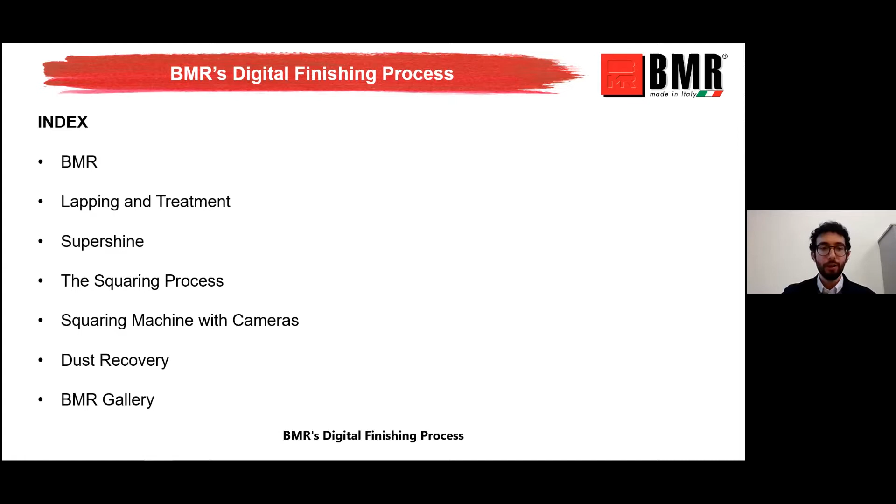BMR's areas of expertise are polishing, lapping, treatment, squaring and chamfering, and cutting systems, for processing glazed ceramic surfaces, porcelain stoneware, porous single and double fire tiles that range from traditional size up to large slabs, up to 1.6 by 3.2 meters and above. So let's start with the first video, please.

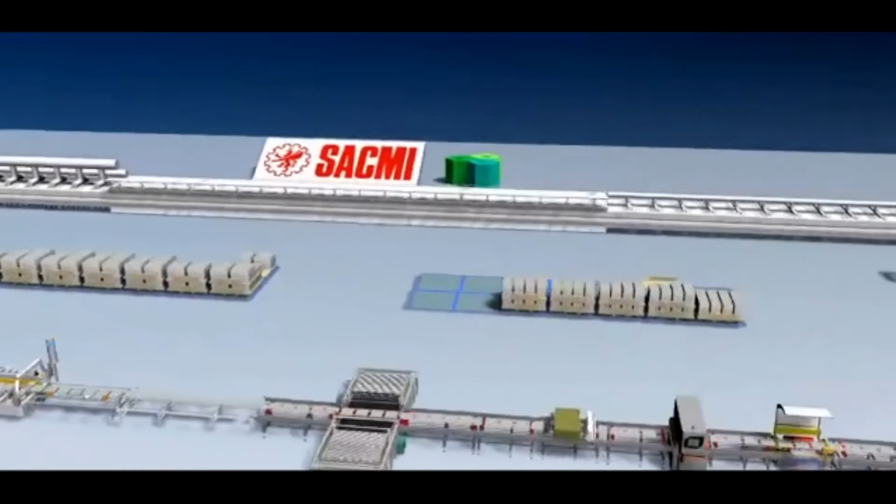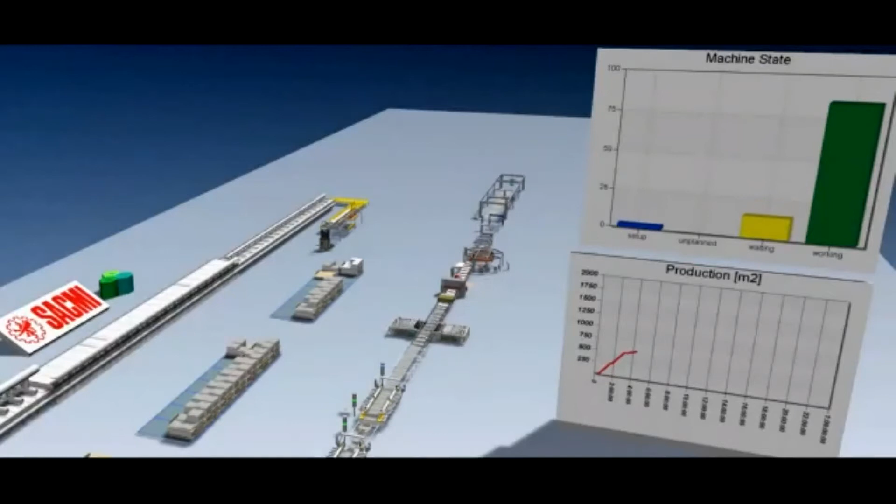Things that seemed to be futuristic some years ago now are becoming the present of ceramic production: finishing line real-time simulator, digital twin, remote control, supervision, data management, interconnection between all the machines, dynamic stock management, and 100% efficiency. In particular, here in the video is shown the digital twin simulator that can calculate and show you the true and accurate production of your finishing department.

Starting from the needed productive efficiency and tile sizes, we can hypothesize production batches and simulate the real production of your actual or future plant. This helps new projects or efficiency increments of the existing ones. Okay, having said that, let's go to the next slides and we'll see an overview of our products and latest news.

Starting from the lapping and treatment process, this is a line example of a standard BMR lapping and treatment line. First, you can see the pre-squaring department, followed by a lapping department with Leviga Plus, then the treatment, and lastly, the final squaring.

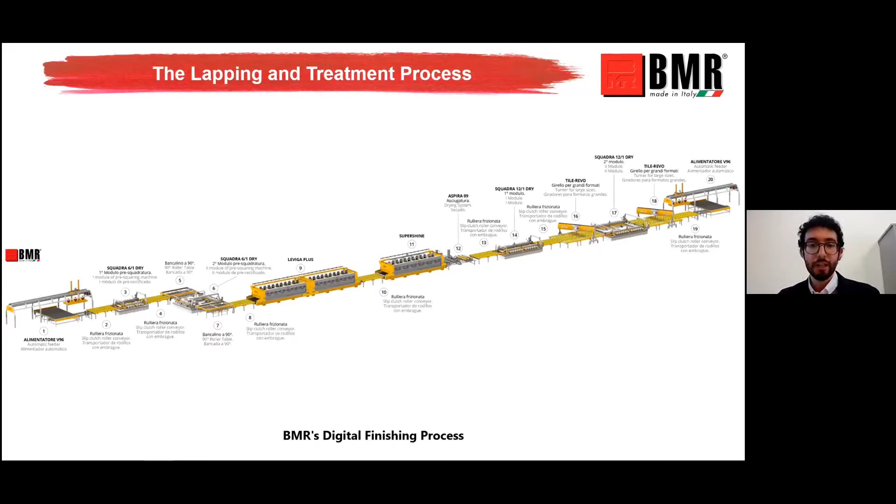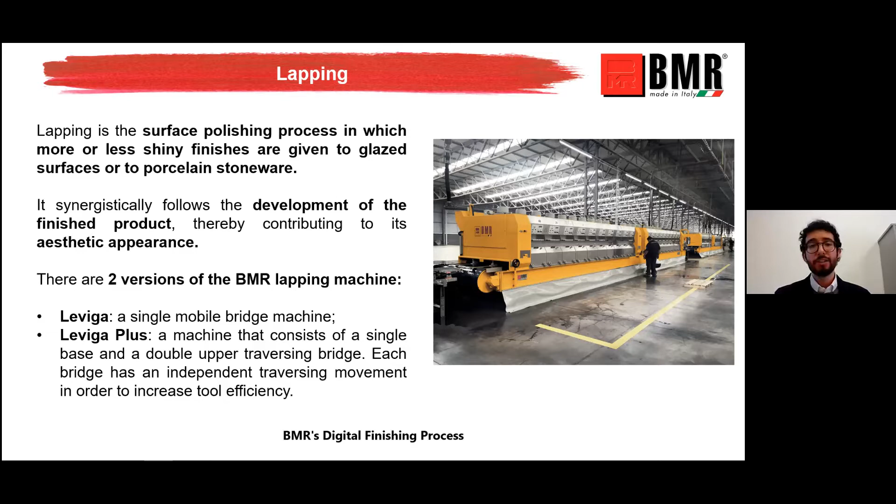Lapping is the surface polishing process that gives more or less shiny finishes to glazed surfaces or to porcelain stoneware. There are two versions of BMR lapping machine, Leviga and Leviga Plus. The first has a single mobile bridge. The second one has a double upper traversing bridge.

After lapping, there is the first treatment, called acid treatment, and it is used to prevent acid attacks on the surface of the tile after laying. Acid proofing consists of applying an acid solution with a sponge roller or a satellite applicator, and then rinsing it with water. As you can see in the slide's two images, before, in the porosity of the tiles after lapping, there are a lot of residues inside the porosities. Only with the acid treatment can you clean these porosities and take away the residues.

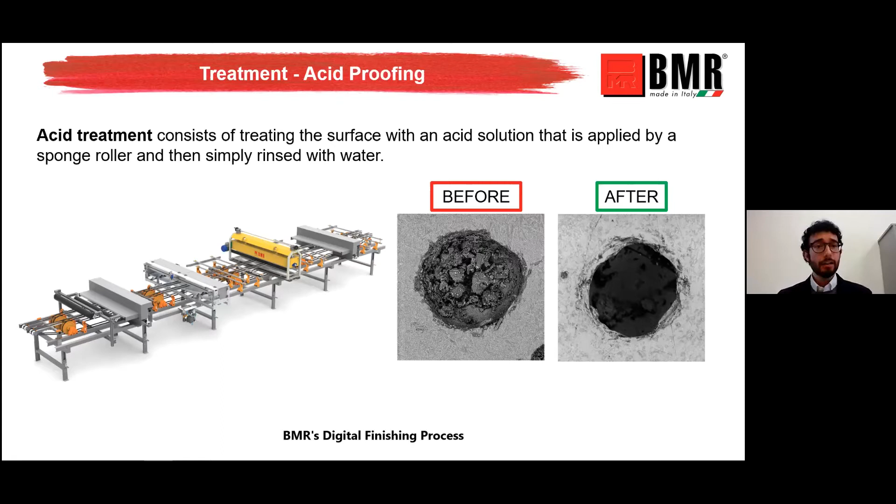Lastly, there is the final treatment. BMR uses two solutions, Top Coat or Super Shine. The Top Coat solution is a line consisting of two brushing units, standard 3 heads each, and the relative fluid applicator. The product applied is cold silicone, and the gloss increase from the lapping is 0. But the process seals the porosity, the process temperature is 35 degrees, and it can be used on glazed porcelain tile, matte, and technical porcelain.

A totally different machine is the Super Shine, with 7 working heads with a dry application of fluid from each head, and then 3 washing heads for final cleaning. The product applied is micronized silica, and the gloss increase will be 30 points and more. This is a super polishing process with a working temperature of 70 degrees, and we suggest using it on glazed porcelain.

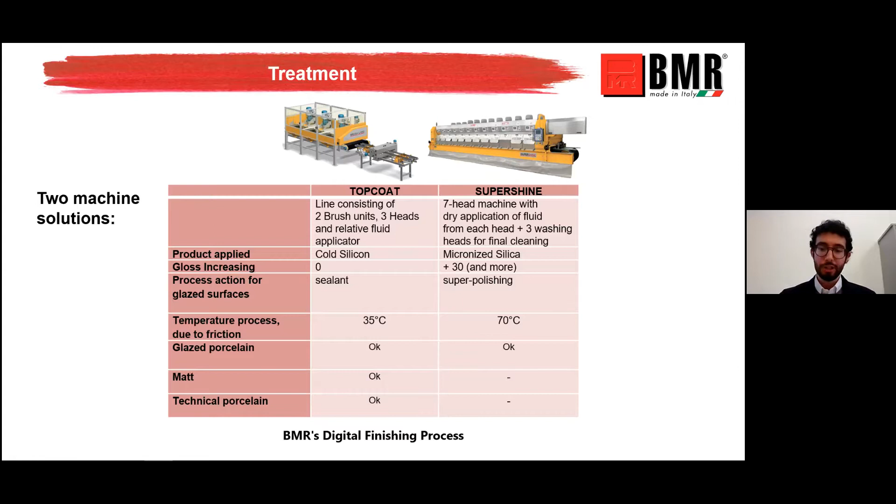We can focus also on the top coat solution. Top coat, as I said before, is a line that consists of a planetary applicator or sponge roller for applying the product, an acid pickling solution and sealant, and a brush. It allows you to get back the product's original gloss produced by the lapping process, because after the lapping there are certain points of gloss.

However, in order to remove the residues inside the porosities, we have to treat the tile with the acid treatment. The acid treatment decreases this gloss, and this solution can get back the product's original gloss after lapping.

Here it is, the Super Shine. It can be thought of as a dry super polishing machine. The machine uses natural silica and a thermomechanical process in order to increase the gloss by 30 units and more. We have installed over 100 machines worldwide. And Super Shine uses 10 580 millimeter diameter planetary heads with 6 160 millimeter tools driven by 15 kilowatt motors.

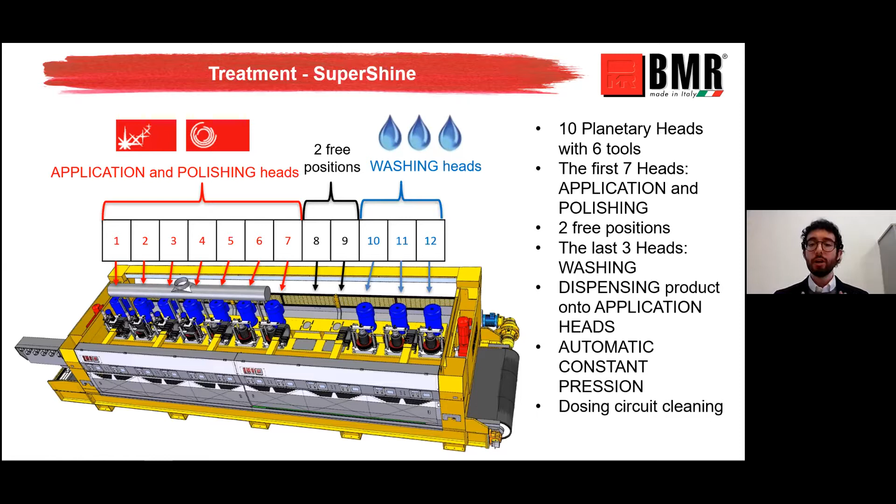Each head applies an adjustable amount of this natural silica in liquid suspension that is then passed by weight on the heads. And of course, the purpose of the first 7 heads is the application and the polishing of the tile. Then there are 2 free positions for the absorption of the product. And the last 3 heads are used for washing. This results in the constant quality of the finished products.

Here we can see a comparison at a glance. Before the treatment and after the treatment, the surface of the tile was photographed with coaxial light in order to highlight the areas that do not reflect light. The untreated tile has so many scratches that make the surface opaque. After the Super Shine, you can see a shiny surface.

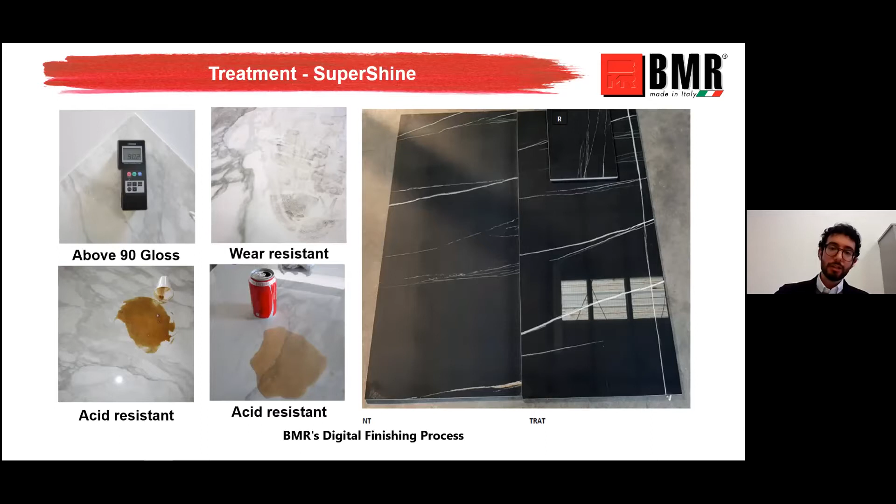These are some of the many advantages of Super Shine. Above 90 points of gloss, whereas the tile is wear resistant and acid resistant. And then in the images here, you can see the difference between an untreated tile and a treated tile. The untreated tile is opaque. The treated tile is shiny with high gloss. And let's see the second video of this slide presentation.

Okay. Now let's go on with the next slide. After the lapping and treatment process, we have the squaring process. After the cutting and splitting process, as you can see in this standard line, the tiles have to be squared and beveled by a squaring machine.

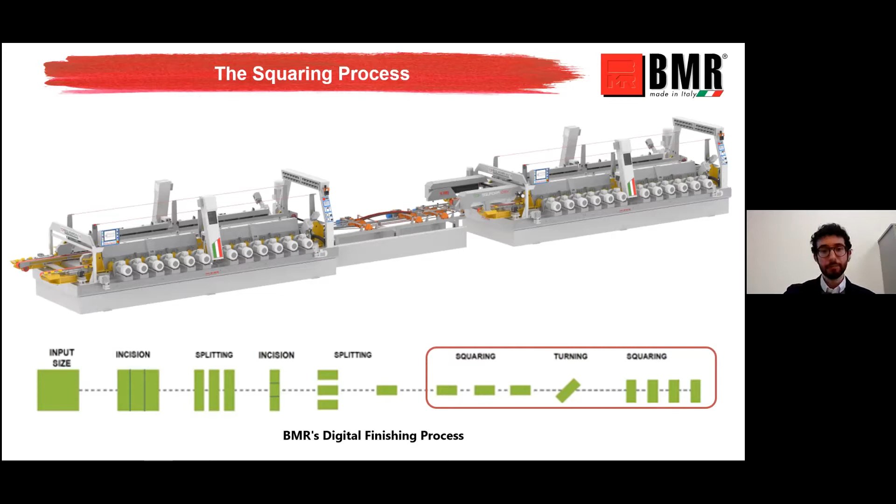The machine, Top Squadra or Squadra Dry, is composed of two modules. The first module squares the long sides of the tile. Then the tile is turned by a tile turner, and the second module squares the short sides of the tile. Let's go on with this video for the traditional configuration of the squaring machine with manual adjustment spindles.

In the video, we have just seen the manual adjustment of each spindle by the operator. But now in the dry squaring machine, we have three different automations. The first is the traditional manual squaring machine, in the video. Then we have the semi-automatic solution with laser sensors and an ammeter pulpit in order to let the operator move each spindle electrically. And then there is the full automatic machine with cameras.

Let's get into it. The automatic squaring machine has an artificial vision system that includes a camera for each grinding wheel. This system is supported by an ad hoc management of the spindles and positioning of the grinding wheels, which can monitor the level of wear and the thermal expansion of the abrasive, allowing a rapid and targeted movement of the grinding wheels. Let's see the video, please.

There is also constant control over the processing, and remote management of the machine. The operator can work outside the soundproof cabin, except for the grinding wheel change. And then there is control over consumption data: all information regarding consumption, duration and efficiency of the grinding wheels is constantly recorded and saved. And there is the possibility of customized reports.

And it's very important also to see a real case of one of our best customers and his choice to go with the full automatic system. Let's see.

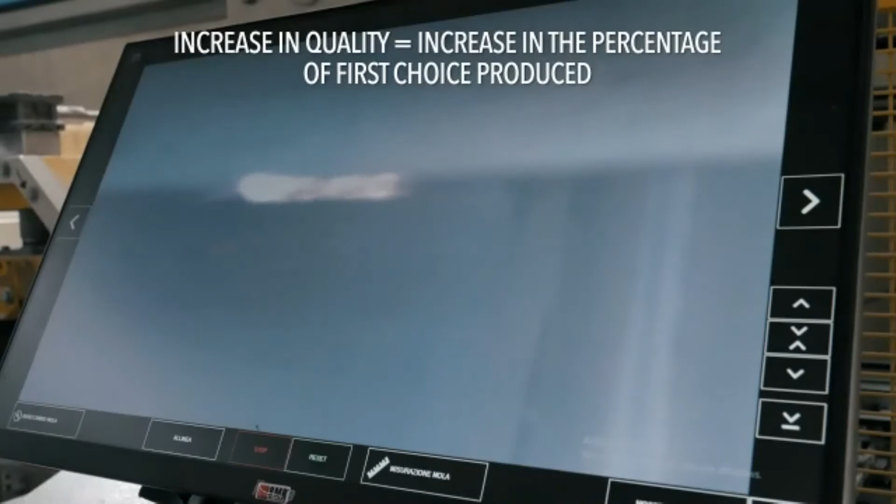With this system, we can really increase the efficiency up to 100%. And of course, an increase in efficiency means a higher percentage of first choice tile.

Another advantage of the dry process is the dust recovery. We made research with the Modena University on powder recovery from the squaring process, to be recovered in the body preparation. The powders can be used in quantities of at least up to 4 or 5% of the body without creating technological problems. Of course, if you work a total white body, you have to recover only total white body powder. But in rustic or specially prepared bodies, the addition of large quantities of powder, 25%, causes only a limited reduction in the colorimetric L value.

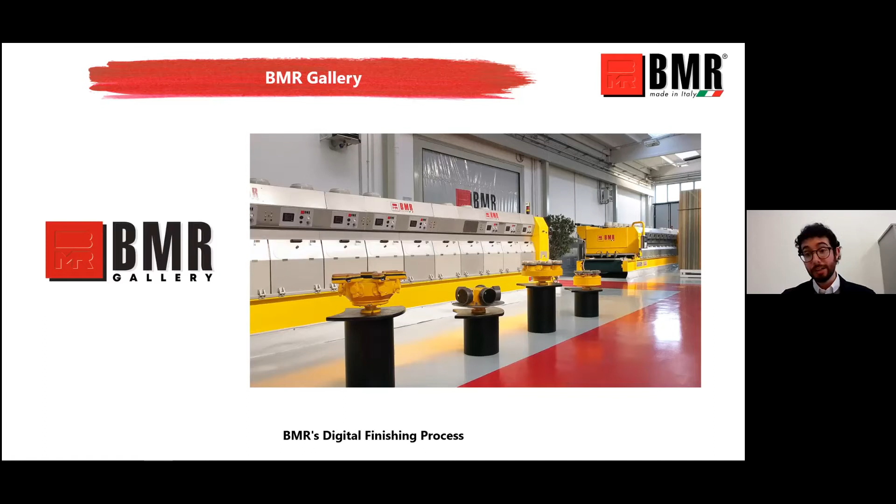And then, last but not least, I'm going to briefly show you our new showroom, the BMR Gallery, a place in which our guests can see our technology and develop with us their new projects.

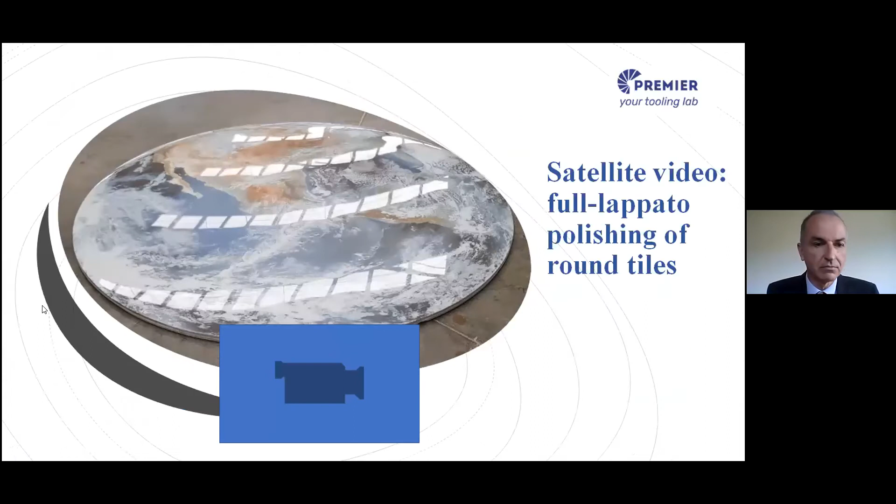All right, let me see how to make it. So we are starting from the end here. I'm sorry. So again, good morning, everybody. Thank you for being here. To introduce the subject of this presentation, we'll talk a little bit about what speed means for a tool from a tools engineer's point of view. Let me move this away, because I don't see anything.

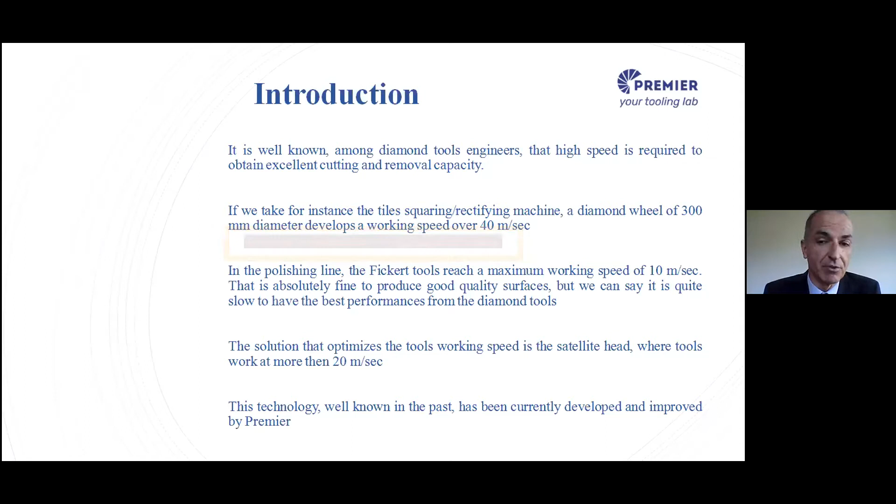Sorry, but I see a window here, I don't know why, I cannot read the text. All right, I'm sorry, technical problem. There are two words appearing again. Paola, if you can help me, there is something appearing in the middle of my screen and I'm not able to see the presentation. Okay, is it working now? Yes. I beg your pardon to all of you.

Anyway, so we were talking about the satellite head. The satellite system consists of a rotating head on which is assembled a series of rotating tools. The combination of the two rotations, together with the translation of the bridge, gives the system a high, homogeneous removal capacity. The Premier satellite head can be installed in all polishing machines for calibrating, polishing, lappato, and finishing.

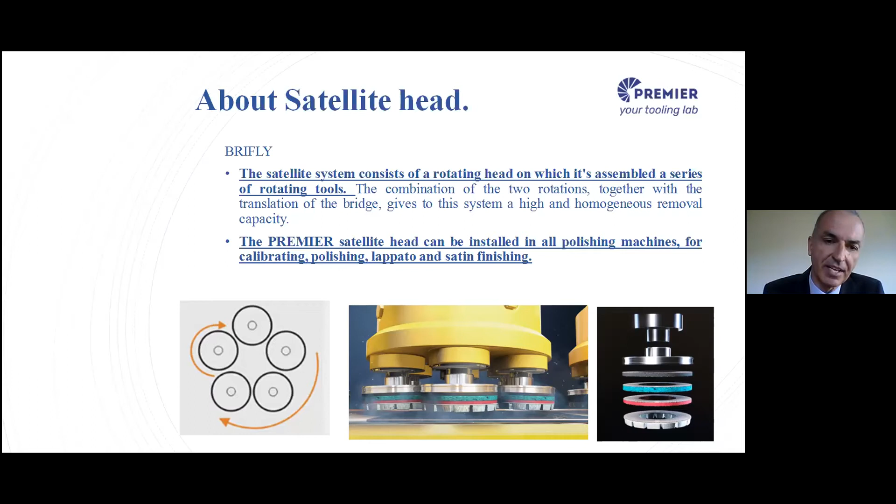About satellite tools, we can say that the satellite works at high speed, and high speed means high removal capacity. As a consequence, we have the possibility to begin the line's grain sequence with finer grains. The homogeneity obtained with the satellite head suggests using them not only at the beginning of the line, but also at the end of it, and this is particularly true when working with dark color surfaces.

Each satellite tool has a unique contact point on the tile surface, meaning each tool describes a different cutting orbit on the area. With 6 tools per head, we have 6 independent orbits, avoiding any possibility of overlapping, and every person who works with polishing and lappato knows what kind of problem overlapping causes. The satellite contact line is about 25 millimeters, very tiny, while the smallest the traditional Fickert allows is about 100 millimeters. That means it's much easier for the satellite to follow any uneven surface and tile edge.

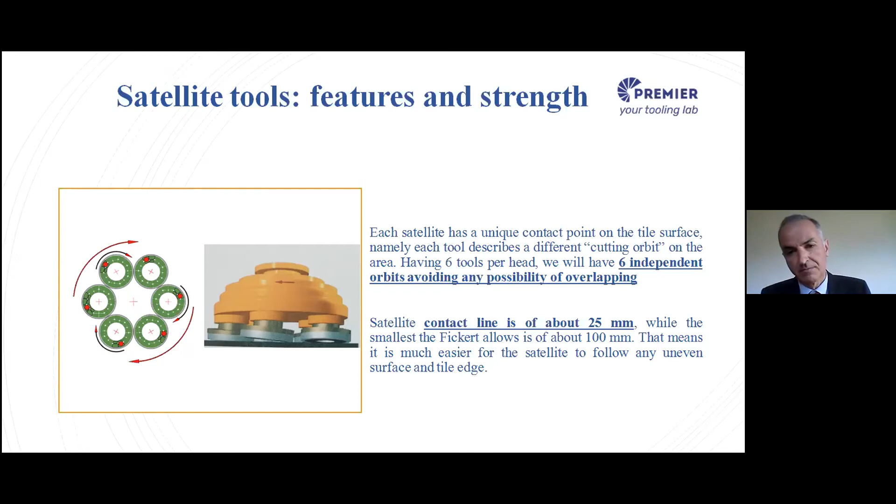So we have seen that introducing satellite heads on a polishing line guarantees not only an increase of production capacity, but also a cost saving on tools of about 15-20% on the whole line.

And the satellite life is much longer than Fickerts, approximately 3 times more for coarse grain tools and 2 times more for fine grains. That means money saving and also fewer stops for tool replacement. The machine maintenance cost is reduced because the satellite heads work at a much lower pressure compared to the Fickert heads.

Then we developed a new system called Speedy. With this coupling system, the time required to change the set of tools is really reduced. It's really quick.

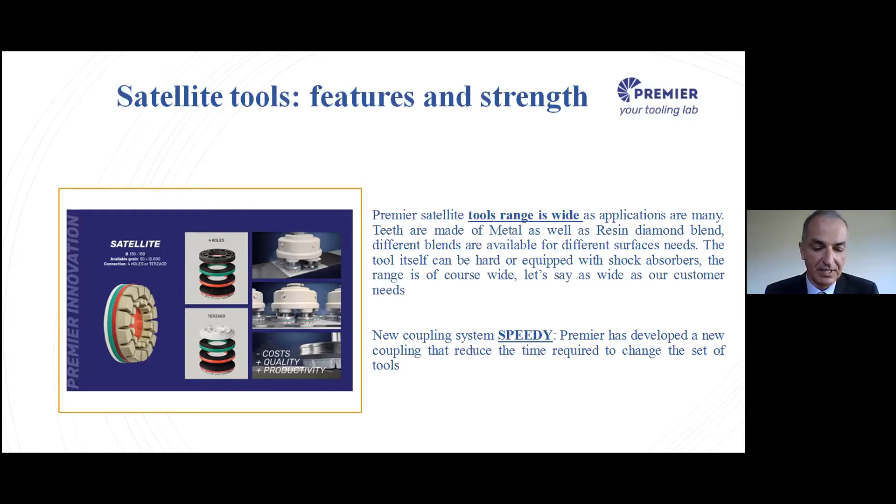And last, but not in order of importance, is the eco-sustainability. With a longer life, these satellite tools reduce the quantity of plastic waste produced by a polishing line. And we are talking about a 40% reduction, which is pretty important, I believe.

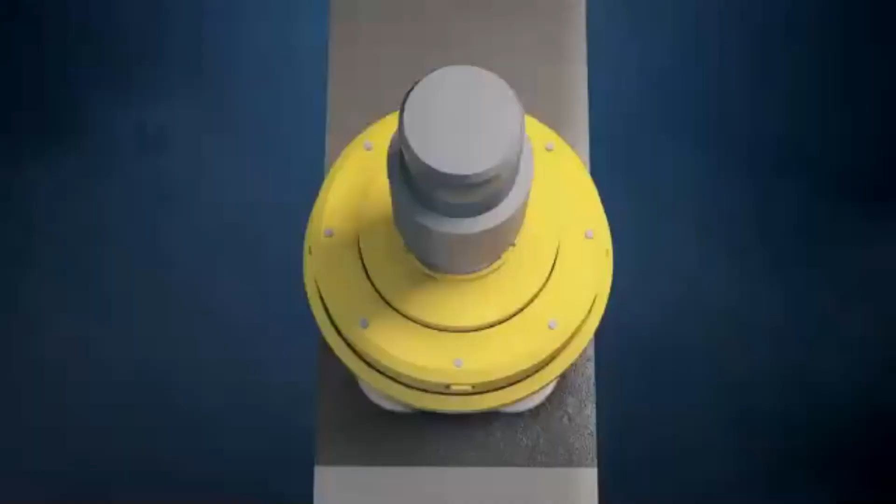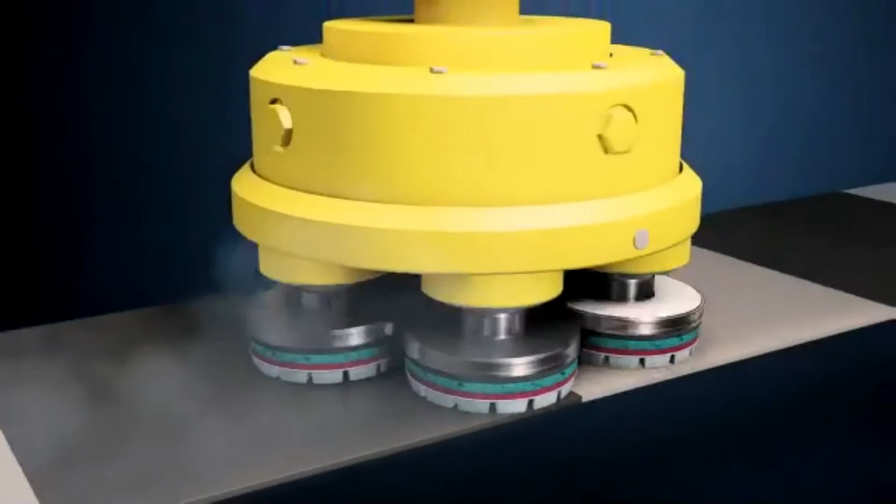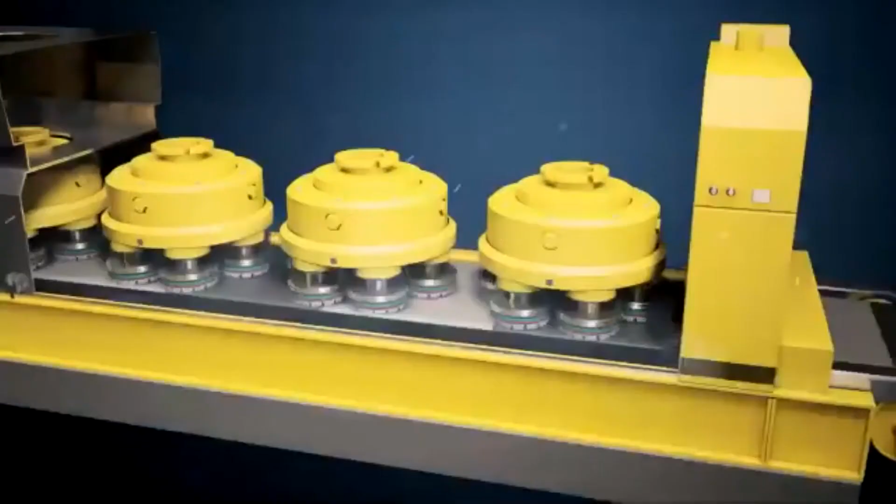Discover Premier's new product. Go beyond the bounds of innovation. We have rethought and improved a diamond-coated satellite head, designed to optimize tile lapping. With this new system, we obtain a more precise, even surface process, as well as increased material removal. The tools have different contact points, so the tiles can be smoothed evenly over the entire surface, including the edges. The smaller contact area with respect to the Fickert enables the tools to penetrate all the dips for a better finish. The positioning and movement of the tool allow the edges and the high and low points to be polished perfectly. Efficiency is doubled, thanks to its power, and with a speed of 1600 extra revs, The Premier satellite head is the equivalent of 2 Fickert heads. Adding Premier satellites to your working line means not only increasing the number of tiles produced, but reducing costs and improving processing in order to offer your customers the highest quality. Fewer, but more efficient heads for material removal allow you to have more space on the line for tile finishing operations. The tool is modular, made up of different layers of Velcro or available in a single block. This allows you to change the setup depending on the kind of tile surface you want to obtain. Modular, fast, and efficient. It enables you to maximize production and efficiency on the processing line, always. Put efficiency first. Choose Premier.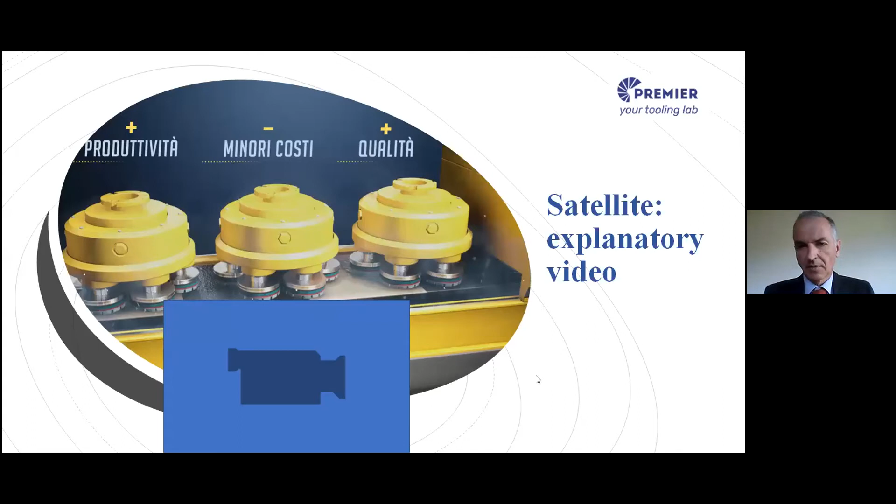So here we are back again. I have to say I like very much the speaker of this video, but he was too expensive to hire, so unfortunately you have me.

Anyway, something about the development and possibilities of this technology. As you surely know, currently some ceramic manufacturers have decided to get back to producing technical porcelain as well.

With Premier technology, there is no need to invest in expensive calibrators and cylindrical heads. Premier satellite head is a system that can be installed and used in every existing polishing machine and allows the production of lappato as well as polished technical porcelain.

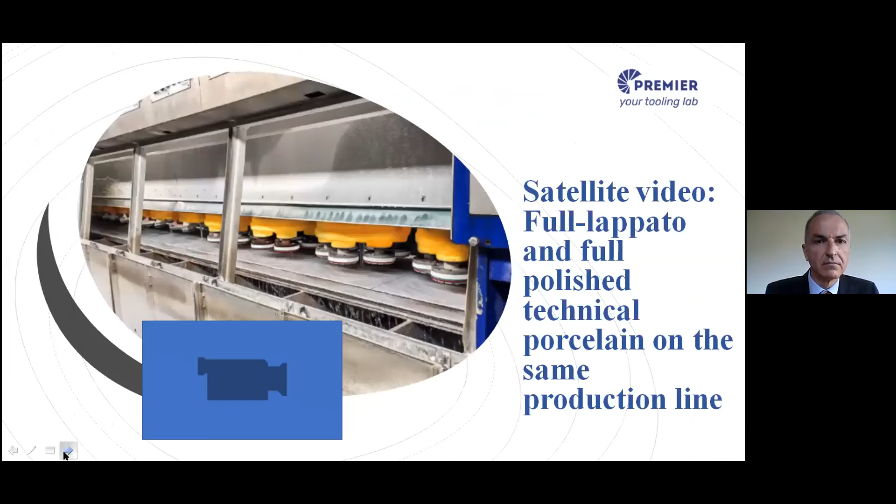All right, here we are back again. Sorry for the technical problems.

So again, development and new possibilities with the Premier satellite heads technology: lapping in parallel rows. We have to consider that the contact points of the satellite tools on the tiles are set back, so the tools are slightly tilted upwards compared to the tile surface, creating this way a natural opening, something like an open mouth.

This feature makes real the possibility to polish in parallel rows, allowing the productivity of a production line to be multiplied at will. This is, of course, absolutely impossible with the fickerts, as the movement can hook the side of the tile and break it.

Looking at this more closely, thanks to our Premier lab in Castellon, Spain, we can say that the rotation of the satellites on their axis pushes the tiles against the conveyor belt, putting an end to the risk of tile lifting.

The same small contact point of 25 millimeters divided into 2 lines of teeth allows the satellite to reach all the uneven surfaces, even those between adjacent tiles.

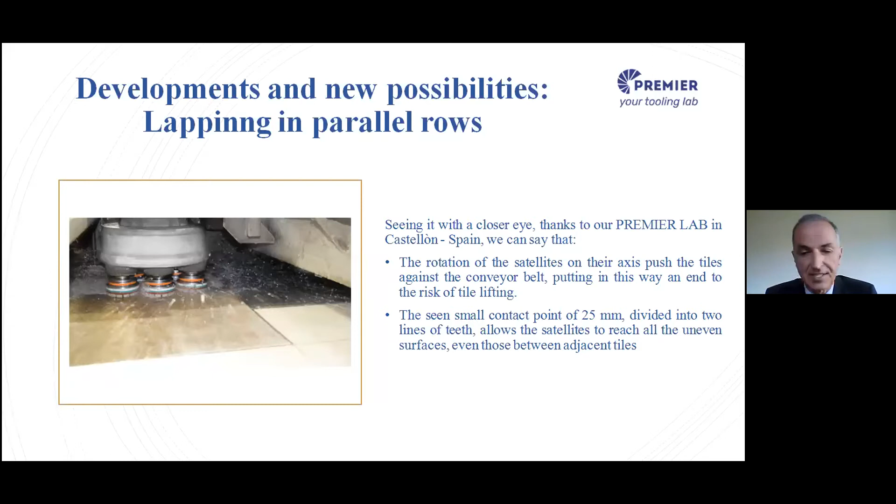And here is another video. Thank you, Paola.

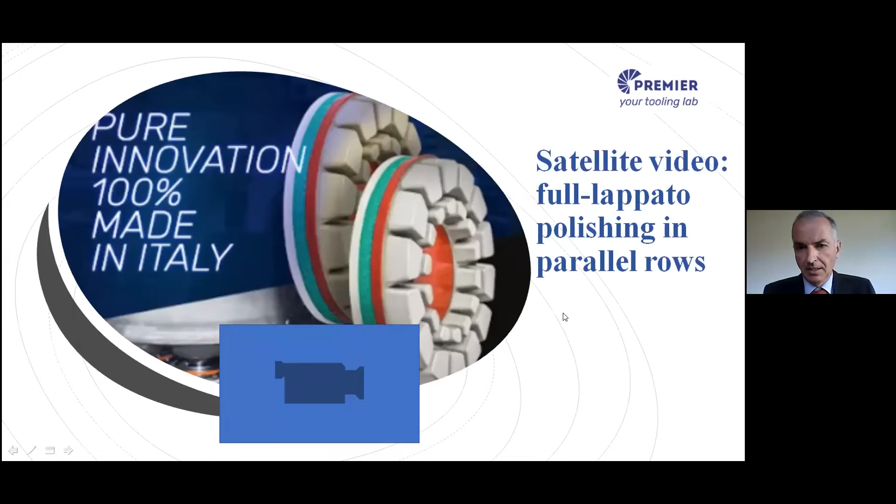So back again, a few words to summarize this presentation. We introduced the concept of tool working speed, underlined that there is an optimum speed at which the tools should work to give their best performances. We pointed out that the satellite system gives such speed.

Then we focused on the new satellite head and its tool finishing, high removal capacity, increasing of production capacity, tools long life, tools cost reduction, less machine maintenance, ease of use, and eco sustainability.

Then we stepped into new applications for this technology. One is the possibility of doing full lappato and full polished technical porcelain on the same production line. And the other is lapping in parallel rows.

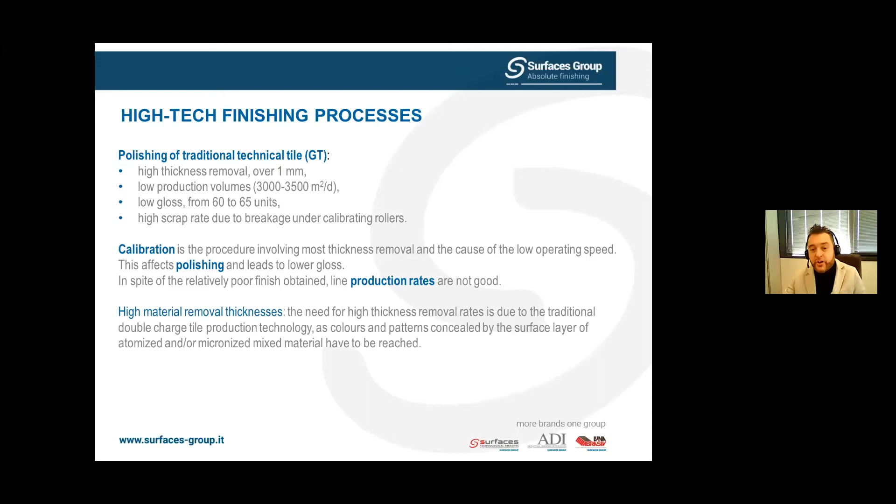If we talk about lapping of glazed porcelain tile, we see a real difference from the technology we observed before. For example, the low thickness removal: the vitreous phase in that case is around 0.5 millimeter, more or less, so the material we remove is about 0.2, 0.3 millimeter. This is necessary to conserve the digital decoration underneath.

The operation speed in that case is higher than before, and the productivity rate is about twice that of conventional polishing, like 7,000, 8,000 square meters a day in a normal production line. Most important is that the final appearance is much better, especially the glossiness, like 90 to 100 units on the gloss checker.

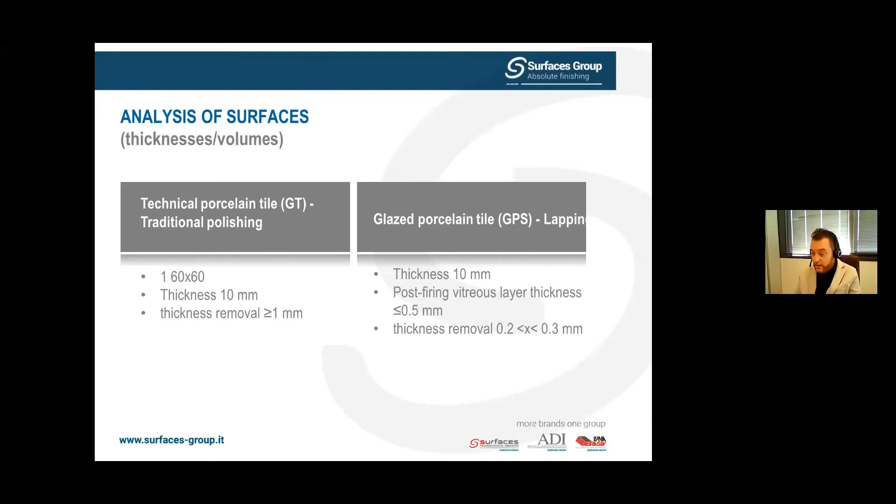If we compare this analysis of surfaces, we can see that for technical porcelain tile in traditional polishing, for example a 60 by 60 tile with a thickness of 10 millimeters, the removal is 1 millimeter. Compared with glazed porcelain tile in lapping, the thickness is 10 millimeters, and after firing there are 0.5 millimeters of vitreous part, and the removal will be around 0.2, 0.3 millimeter.

So this observation gives us some important remarks to keep in mind about the state of the art and the production facilities now running. There is obviously a substantial difference between these two categories, with major implications for the finishing procedure and result. Clearly, we can consider technical porcelain and glazed porcelain, although with wide variety, as two macro categories.

Given this variation, the sequence that we will describe now is customized depending on the different surfaces, volume, and thickness found in the market. All these reasonable observations come from an important innovation. Thanks to the new forming and decoration procedures, the technical porcelain tile category now includes ceramic products which do not require a high thickness removal rate during finishing and polishing to reach the decoration level and provide the finishing required.

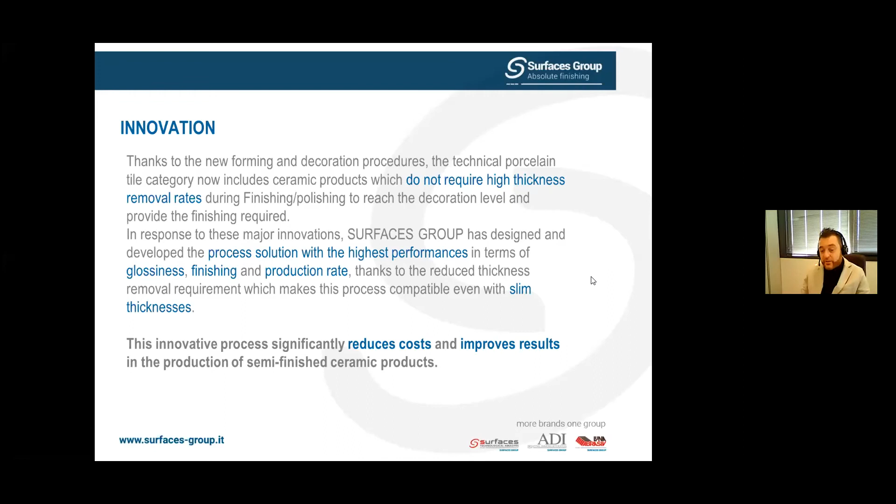In response to those major innovations, Surfaces Group has designed and developed a process solution with the highest performance in terms of glossiness, aesthetics, finishing, and production rate, thanks to the reduced thickness removal requirement, which makes this process compatible even with slim tiles or slabs. These innovative approaches significantly reduce cost and improve results in the production of semi-finished ceramic products. Now we can see a video that will explain the process.

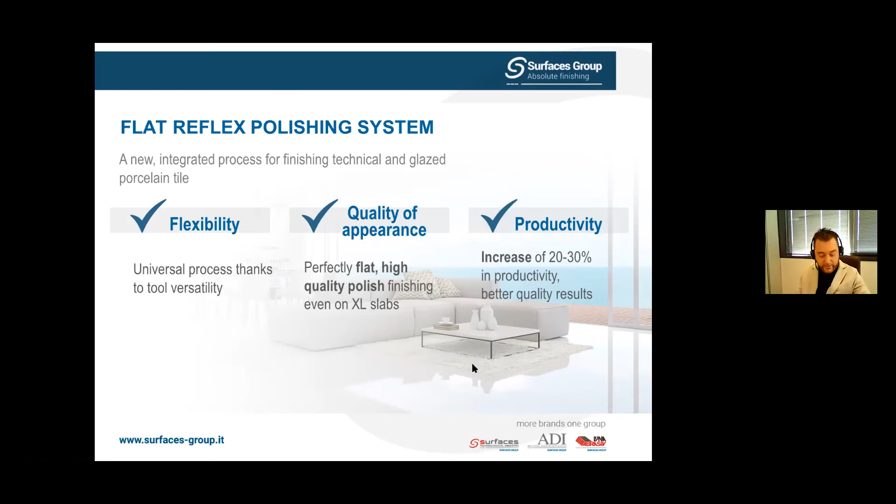at the end. The quality of the appearance, the perfectly flat polishing, the high quality polish finishing, is possible not only on ceramic tiles, but also even on the XL slabs, now very common for the Italian and world market. Also important is the productivity. There is a consolidated increase of productivity around 20 to 30%. This goes alongside a very high and better quality result.

Talking about the first category, the flexibility of this new concept of multifunctionality and elasticity, the system adapts easily to different types of tiles and slabs, different sizes, different forming technologies. So we can say that the entire porcelain tile finishing cycle can be handled by the same process without any substantial change. Only tools make the difference.

The quality of gloss, that's also very important for the market and for the appearance. Higher thickness removal capability, more in area than in volume. So this makes best also the biggest surfaces. The perfectly flat and polished finish with the exquisite appearance even on XL slabs, regardless of the thickness, superior even to marble itself, which increases also the production rate. A perfectly flat surface with the gloss finishing and the uniform polishing gloss.

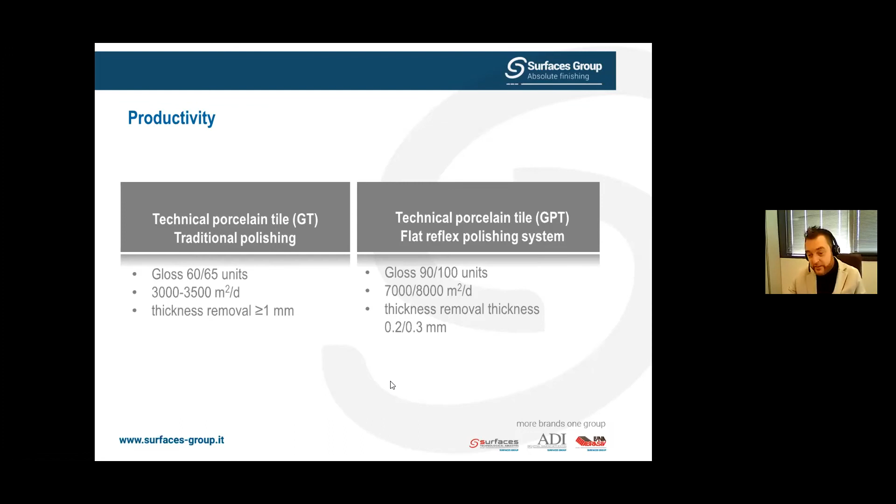How can we classify the processing phases on the technical porcelain tile? We classify them in 4 steps. Step 1, the thickness removal, is made by the polishing tiger. Metal, thicker, flexible and adaptable to all surfaces, ensuring uniform processing. Step 2 is a calibration.

I prefer to call it a micro calibration due to the very small volume that we are removing, and it is made by the cylindrical head metal grinding wheels. We call them turbo tools. Longer life is one characteristic, more thickness removal compared to the other tools in this process. High yield performance, efficiency over 98%, and reduction of cost per square meter.

Step 3 and step 4 are made by tangential head full resin bond grinding wheels. Characteristics of these tools are uniform processing of surfaces, higher first grade, higher thickness removal rate, especially in terms of area, and greater flexibility. Especially step 4 is made by Superlux, which gives us this higher glossiness.

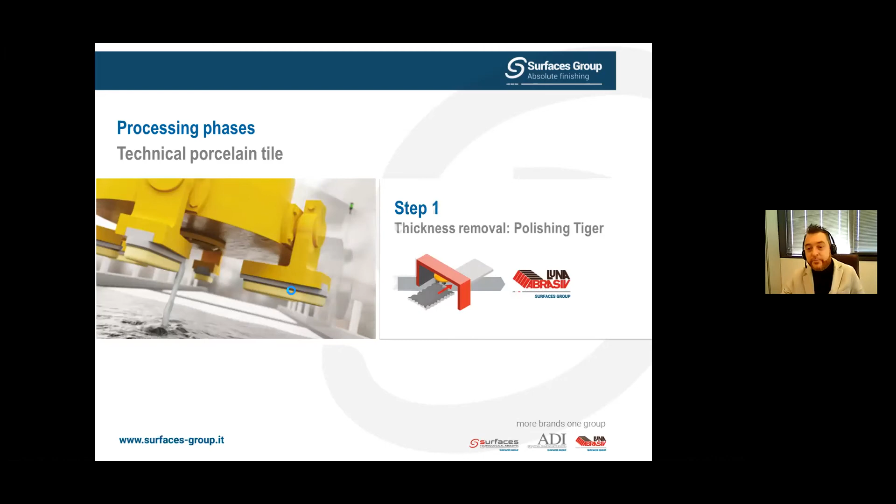So for the technical porcelain tile, step 1, we remember, is made by the polishing tiger. So metal bond, let's say rubber in between, and plastic injection. Step 2 is made by turbo tools, calibration tools, metallic wheels or resinoid wheels, depending on the grit.

The third phase is made by the polishing full, again a resin bond. They are specially preparing the finish for the fourth step, where we achieve the finishing and the glossiness effect with the Superlux tools.

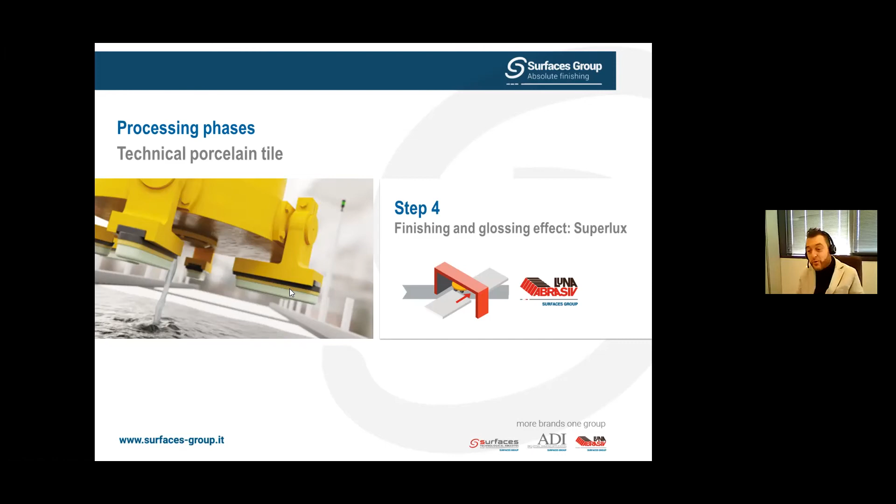If we talk about the processing phases for the glazed porcelain tile, it's very easy, in the same finishing process line, to pass from the porcelain tile we talked about before to the glazed porcelain tile that we are talking about now, just reducing the application. We do not need anymore to remove more material with the calibrating phases with the turbo tools or the removal phases with the polishing tiger.

So directly it's possible to lap the slabs or the tile with the full polishing in the first step for preparation. These are all tangential head resin bond, with uniform processing of surfaces and higher first grade, higher thickness removal rate, especially in terms of area, as we saw before, and also greater flexibility. The second step is made by the Superlux, which gives us the quality of glossiness and the mirror effect that we are looking for.

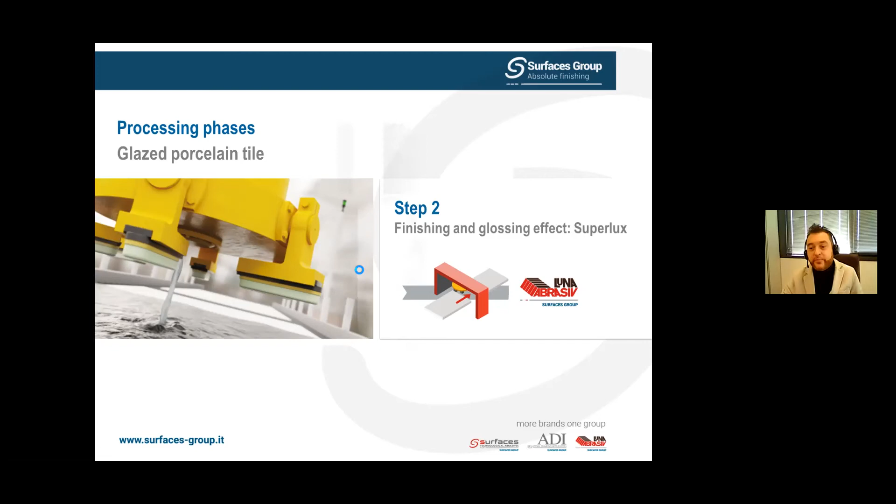So again, we can see the step one for the glazed porcelain tile with the polishing fulls, and we finish the glossy effect with the Superlux, as we said before. Now we take a look at two tiles. On the left, a technical porcelain tile, perfectly reflecting light, and also a glazed porcelain tile on the right side, a black one, so a very difficult exercise of polishing with the perfect straight flatness with our new technology, the Flat Reflex polishing system.

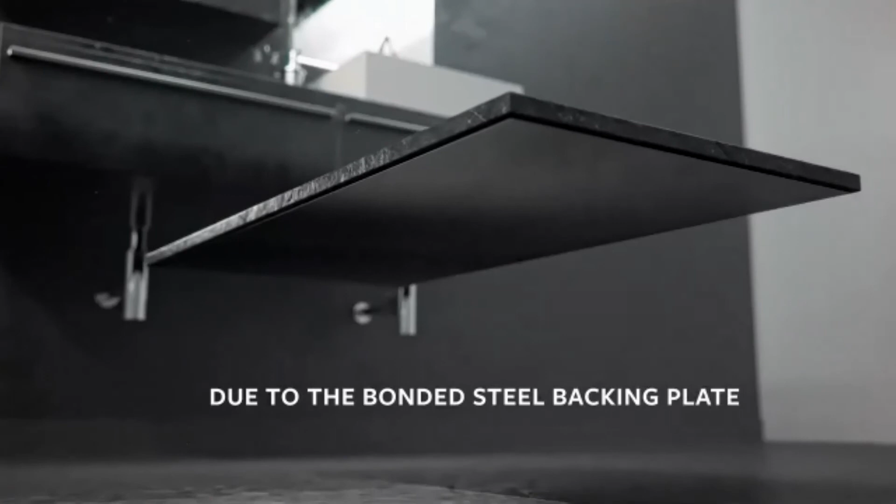In today's session, we'll explore our new technology called ForTile. ForTile is a reinforced tile technology for the production of tiles with a very high impact strength. The bonded steel backing plate creates outstandingly high impact resistance for floating and raised floor installations. ForTile consists of 3 layers: the authentic ceramic tile itself, which is glued together with the steel plate. During the production process, the ceramic tile and the steel plate are first heated up to a certain temperature prior to being glued together. During the cooling process, the glued steel plate contracts more than the ceramic tile, exerting a compressive force on the latter. This compressive force makes the ceramic tile stronger than a traditional tile.

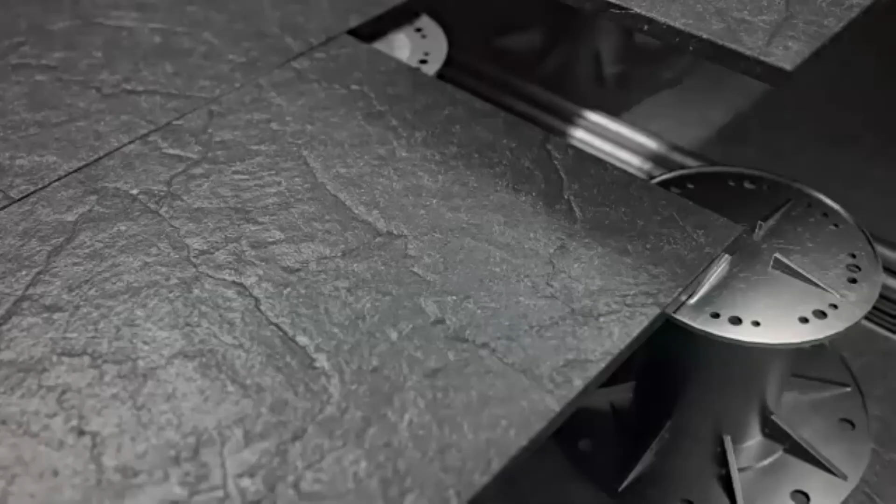Its higher impact resistance is ideal for raised floors because of the breakthrough protection. 3 options are possible: a grouted version, which is completely water resistant, a groutless version with plastic edges, which is very easy and fast to install, and a raised floating installation using a thicker tile. The ForTile technology was invented by Mr. Mariano Paganelli, founder of ELS, Expert Lab Service. Mr.

Paganelli is a former professor at the University of Modena and Reggio Emilia. He is a worldwide expert with more than 40 years of experience in the ceramics industry. I now leave the word to Mr. Paganelli. The main issue when I approached the problem of easy setting was the toughness of ceramic material.

Ceramic tiles can be resistant to almost anything: stain, scratch, acid, ice, fire, load. But they have a single weak point: impact resistance. The effect of an impact on a floating ceramic tile is, in most circumstances, a failure of the tile. I designed ForTile in order to be impact resistant beyond any expectations.

Ceramic tiles are renowned for their durability and ease of maintenance. The only drawback is the issue of remodeling, which requires demolition. ForTile does not require gluing on concrete subfloor, nor on the old floor, regardless if it is ceramic, wood, laminate, or anything else, as long as it is flat. ForTile can be set over a self-adhesive mat.

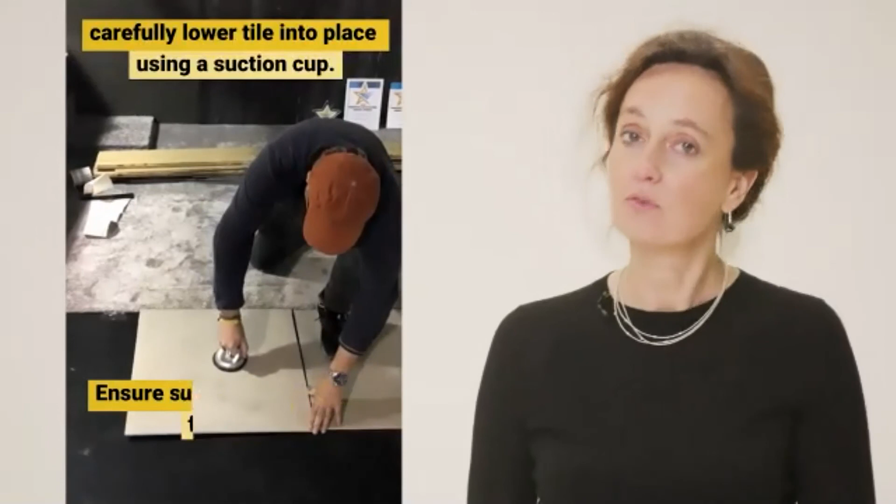Thank you, Mr. Paganelli, for this clear explanation. Different types of underlays can be used to allow easy installations: adhesive mats, double-sided adhesive strips, Velcro, but also magnetic mats. Our partner, IABEC, developed the Easy Install underlay. It enables a ceramic floor to be installed in a fraction of time compared to traditional installations. In fact, it's possible to fit 1 square meter of flooring in just 2 minutes using this combination.

This innovative, award-winning underlay is dry-laid and combines dry-tack adhesion with magnetic technology to hold the ceramic tile in place. This unique dual-grip technology provides an instant attachment and maximum durability. Simply roll out the underlay, cut it into shape, and fit the ForTile tile on top. The system can again be used with or without grout. Design changes, access, and repairs are quick and easy.

The Easy Install underlay always stays in position, yet the top surface tile can be easily lifted within seconds and simply replaced by a new style or design. Because the process is adhesive-free, there's no residue left on either the tile or the underlay. The underlay remains uncontaminated and ready for installation of new tiles straight away, while the original tile can be reused or recycled. To summarize and conclude, ForTile is an amazing new licensable technology that prevents dangerous breakthrough of tiles thanks to its steel backing plate.

Unilin Technologies offers a range of innovations for the ceramics market, providing solutions to existing problems.